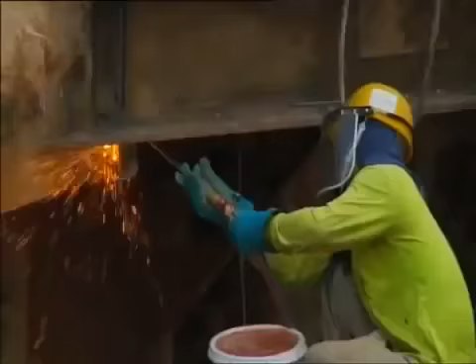Singapore's Marina Bay Sands is one of the world's most complicated construction projects. Engineers have to build not one, but 3 skyscrapers that will shoulder a sky park as big as an aircraft carrier. Worst case scenario, we get stuck.

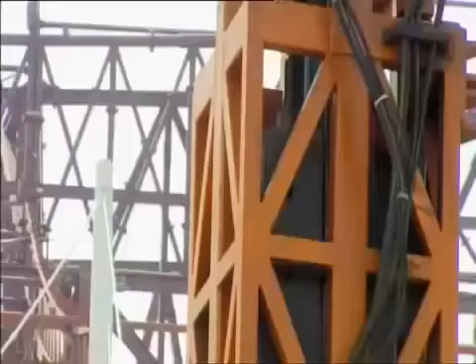They have to devise ingenious solutions to assemble a 60-meter tall museum of impractical dimensions, install giant artworks, and erect seemingly floating pavilions for shopping and entertainment. If engineers succeed, they will create a virtual city unto itself.

Singapore, the Southeast Asian country, is smaller than New York City. The lack of space forces it to build its largest leisure and entertainment hub to date on a small tract of reclaimed waterfront land. The Marina Bay Sands. It's not one megastructure, but many. Serious challenges lie in the array of buildings that form the unique complex.

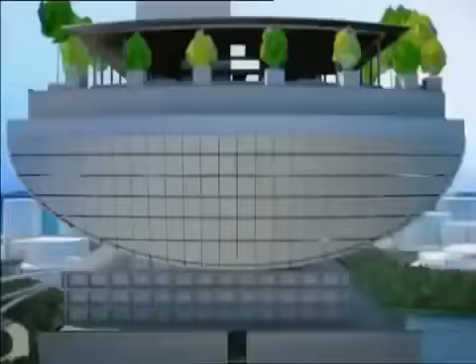3 55-story hotel towers slope at such great angles, they're in danger of buckling under their own weight. An even bigger problem is the hotel's roof. A 340-meter sky park spans its length, containing gardens, outdoor pools, and the world's largest cantilevered observation deck. But how do you build something as big as an aircraft carrier, 200 meters in the air?

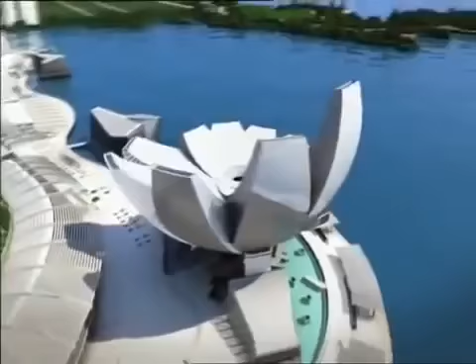In the hotel's atrium, mammoth works of art have to be somehow incorporated into the architecture. Its challenging centerpiece, a 15-ton mass of steel by a renegade artist from Britain. A 60-meter tall art science museum is designed for maximum visual impact. It will be to Singapore what the Opera House is to Sydney. Only one problem. It seems too impractical to construct.

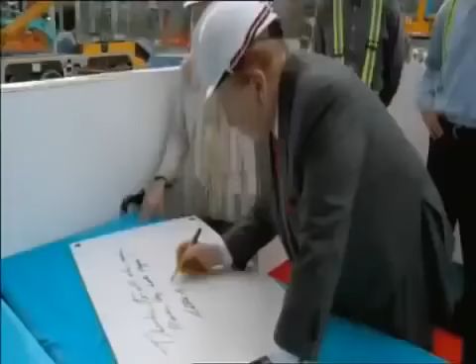And a set of dramatic glass-encased pavilions, while themselves pose little challenge, have to be built in water. The man behind the Marina Bay project understands the risks, but he believes that anything short of astounding will fail. Sheldon Adelson, one of the world's richest men and CEO of Las Vegas Sands Corporation.

What we hope to accomplish is to change the face of Singapore tourism. So we expect a very successful development. That is by far the largest and most expensive single project we've ever undertaken. It'll cost about 5 to 5.5 billion US dollars. It's a lot of money. Now, I know $1 billion doesn't buy what it used to, but by any measurement, it's a lot of money today.

Adelson believes his huge investment is safe in the hands of Moshe Safdie, a world-renowned architect. Safdie is recognized for his use of dramatic curves and geometric patterns. The Marina Bay complex will be his largest and most difficult project yet.

I think that architecture has to be timeless. Therefore, what it espouses, what it provides, needs to be something that has a long life. What's unique about Marina Bay is all the pieces coming together. You can't think about it as individual buildings. You've got to think about it as a piece of city. It's much more a symphony than it is a sonata.

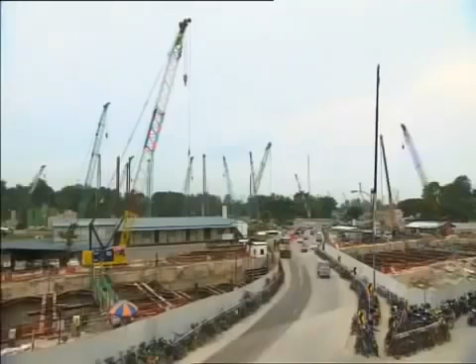On the ground, engineers are more concerned about the reality of building Safdie's vision. This is the North Retail section area. 30-year veteran John Downs is in charge of overseeing the entire project. The design is very, very diverse, and each component of the project is totally different from the others. For a project of this size, with the planning, the design, the construction, you'd be expecting somewhere between 6 to 7 years. Here is basically a 3-year turnaround.

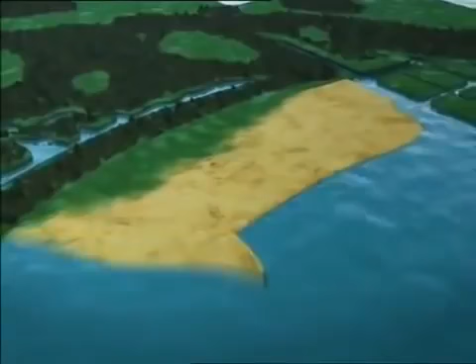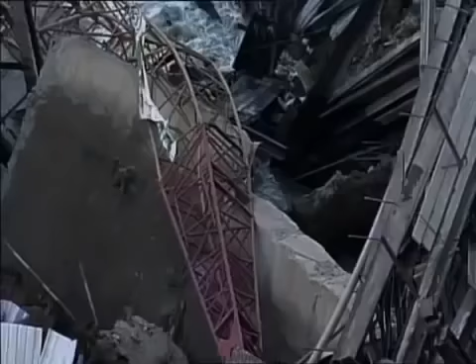Beneath the reclaimed land, which is essentially a seabed, is a dangerous layer of marine clay. Sometimes called black toothpaste, marine clay has very poor structural properties. If not given complete respect, the unstable marine clay is potentially fatal. In 2004, Singaporeans discovered the lethal consequences firsthand. A routine excavation in an underground tunnel for the mass rapid transit network causes a collapse, creating a gaping hole in the Nicoll Highway, killing 4 workers.

The ground conditions in which they were building the Nicoll Highway were not dissimilar to those we are encountering here. They had also soft clay, they had similar depths of excavation between 20 and 37 meters. One of the big things that was learnt in the Nicoll Highway collapse was the importance of monitoring movements and the control of quality as the construction proceeds.

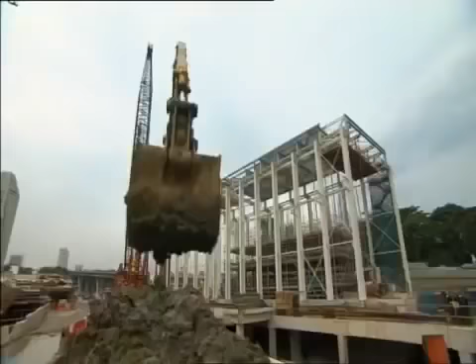Marine clay is an old foe of engineer Mike Barton. He's defeated it in the past by understanding how it behaves. The big problem with marine clay is that it is so soft that when you dig out the inside, the walls will move and potentially collapse and allow all the surrounding water in the bay into the excavation. So, before work can begin, the unstable building site needs major fortification.

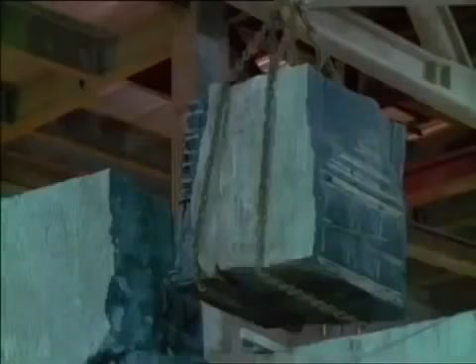To combat marine clay, engineers decide to build giant concrete walls to create stabilizing perimeters for the larger buildings, known as diaphragm walls. Up to 1.5 meters thick, diaphragm walls are steel-reinforced concrete sections, pounded 50 meters into the ground. They form watertight enclosures for men and machines to work round the clock.

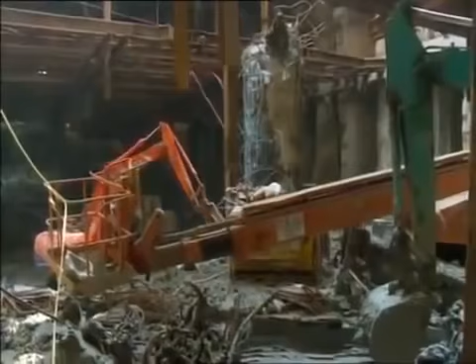In just 1 year, over 4,000 meters of diaphragm walls help produce a rock-solid foundation. The diaphragm walls that we constructed in a formation which we called a peanut formation, which is 2 circles joined together, and a donut formation, which is circular, are able to withstand very, very large forces from the marine clay without any movement. They encapsulate an area bigger than a football pitch that enables us to excavate very quickly and to build structure up very quickly.

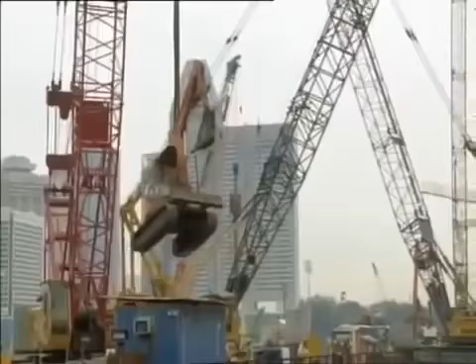Securing the footprint of the Marina Bay project has already taken a year out of John Downes' schedule. He now faces the difficult task of erecting the resort's many buildings in a space of just 2 years. Just managing the whole logistics of that, including the construction methodology, is very, very challenging for us.

To meet his tight deadline, Downes chooses the most direct solution. He hires 16,500 workers to construct every single building, simultaneously. It's like leading a small army, so organizational excellence is key.

We're just on the edge of Singapore in the CBD here. So rather than lose the contractors and the workforce to go off-site, we built our own 3-story project office. We have all of our contractors, our subcontractors here. We house our resident site staff. We have our project management team, our construction management team, our design management team, and the logistics here.

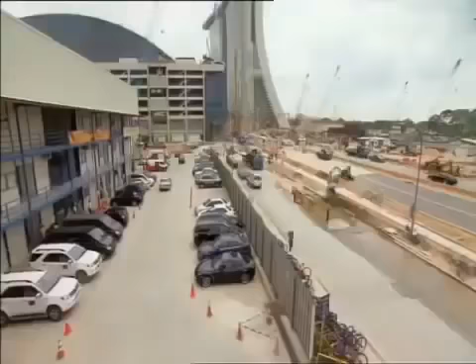Come lunchtime, the monster workforce creates another massive challenge for Downes. He responds by building one of the world's largest site canteens.

We've got 13, 14 different food styles here. You can see by my shape and size that I eat here every day. I enjoy this food. So here you can see the project bakery. It has its own ovens. It's set up for breakfast. We cater for sandwiches during the course of the day. Can I take a sausage roll, please? So, freshly cooked food, straight from the oven. We stand by our products.

The tight schedule also creates problems at the hotel towers, where engineers are already struggling with a congested site. The important thing to do is to make sure that they come in and deliver the goods straight away and then get out again. We don't want too many vehicles on site at the same time.

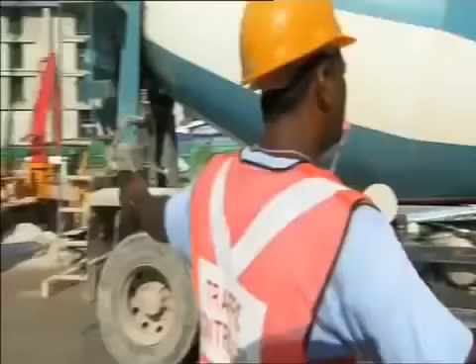To speed up construction and alleviate traffic congestion, engineers turn to a method that's proven itself countless times in the field: in situ concrete casting. Hotel walls are made on site in the thousands. And workers laying the floors are so proficient, they produce 1 floor per 4-day cycle.

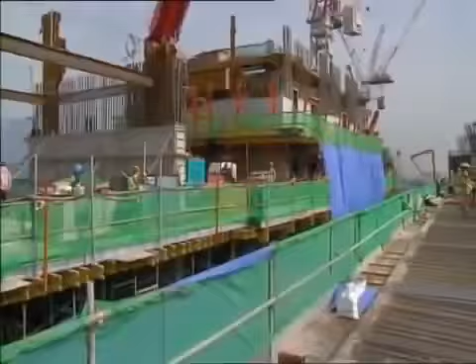It's an impressive display for a conventional solution. But the structure they're attempting is anything but conventional. The key challenge of building the hotel towers is its unusual design. Unlike other skyscrapers, part of the towers slope at incredible inclines. Like a set of collapsing dominoes, the towers could buckle under their own weight if a practical building solution is not found.

It's a major concern for engineer Craig Glover. I've been in the industry for 25 years, done a wide range of projects in many different countries, but nothing compares to this whatsoever. There was nothing we could take reference from across the street, on the next high-rise, or across town. This is a new frontier.

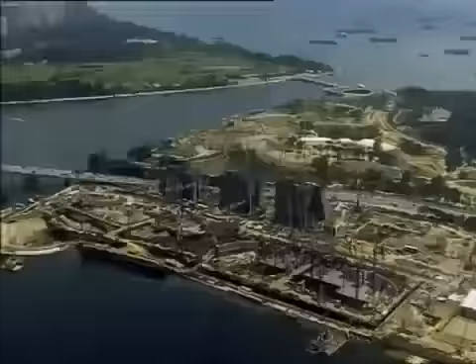Costing a staggering $5.5 billion to build, the Marina Bay Sands could be one of the world's most expensive mistakes if engineers can't solve the tower's problematic structure.

Engineer V.C. Cheong leads the design team, and their solution comes out of left field. If you look at the configuration, it's not a straight tower. It's with a sloping leg. So all this sloping leg actually is, inducing a very huge external force onto the structure. We kind of built it without any support. So we actually formulate a solution to prop up the sloping edge.

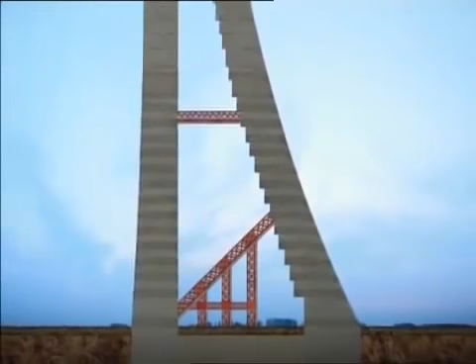Using a technique they've never employed before, engineers build large temporary struts made of strong structural steel. They prop up the sloping towers as they rise. Like a suspension bridge, high tensile steel tendons, also known as tension cables, give an added layer of support inside the walls. In theory, both the struts and the tension cables are temporary and will be removed once giant link trusses connect the towers at the 23rd floor.

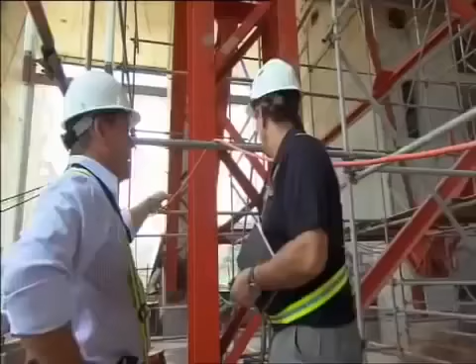The sheer weight in concrete is enough to topple the towers at level 8 if the engineer's calculations are wrong. To reduce the chances of failure, Glover and his team make a radical decision: instead of removing the temporary tension cables in the tower walls, they make them permanent supports.

I feel good it's in there because it's added strength, it's added support.

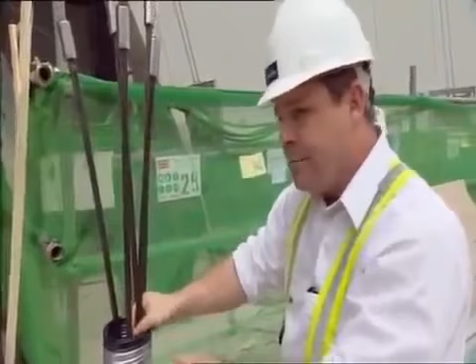We have a twined network here of high-strength steel, and what we do is we bundle these up so they form a cord with multiple strands inside this conduit. We place this conduit inside the walls prior to casting the concrete. So what we then do is once the concrete is cast, we anchor one end into the concrete.

So we then put a very high-strength pneumatic jack onto the collar and one by one pull these strands through and tension them up. What that does is basically pull the building back and hold it in place.

If these cables were to suddenly break, or if they weren't in place, we wouldn't be able to control the self-weight as we build more and more of the building up. So it's a very important part of the actual engineering of the solution, to hold the building in place until we can connect it.

Despite the team's quick thinking, the true test of their engineering decisions will only happen once the main support struts are removed and the massive link trusses installed.

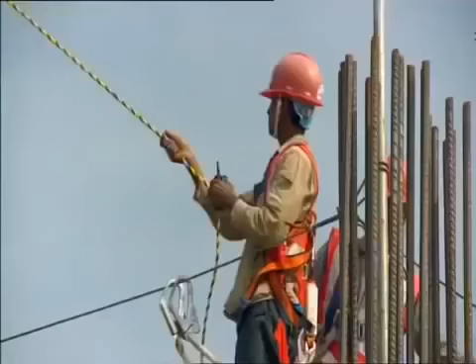Link trusses are huge reinforced steel brackets that bind the towers at the 23rd floor. Once their installation is complete, they transfer the sloping tower's weight completely away from its temporary struts.

Once we're satisfied that we don't have any stability issues, then we can bring the large hydraulic cranes in and, member by member, start to dismantle the struts.

We've got a lot of time pressure, so we've just got to make sure that these things keep moving. It's done its job holding up the building, now it's holding up the job.

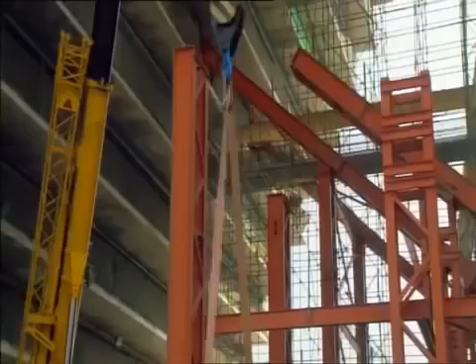As the last pieces of support struts leave the site, Glover and his team can finally breathe a sigh of relief. The link trusses are holding the building load.

So far, so good. It's a lot of theory, a lot of calculations, but until you really do it and really get it out of the building, you never quite know. I'm always waiting for the phone to call in the middle of the night that something's gone wrong.

Not all the structures have ended up according to plan. The 60-meter-high ArtScience Museum is facing a major design overhaul. Planned as a venue for blockbuster exhibitions on the arts and sciences, its bowl-shaped roof doubles as a 3,000-seat amphitheater.

Unfortunately for engineers eager to start its construction, architect Moshe Safdie isn't happy with its current shape. Somebody looked at them and said, looks like a bunch of bananas. In fact, Mr. Adelson said, looks like a bunch of bananas. I said, well, if they look like a bunch of bananas, we're not there yet.

It's terrible news for Safdie's design team, especially its principal, Gene Dyer.

There are times that Moshe will come in with an idea. We think it's quite exciting. We'll pursue the idea for weeks or even months. He'll come back and say, I want to change the idea. And we've already bought into the idea, so it's a bit frustrating.

To rework the unique geometry and dimensions of the ArtScience Museum, Dyer and his team turned to advanced 3D modeling programs. It not only makes navigating the museum's complex geometric patterns easier, it shortens the process to a matter of days. The model is dynamic and it can be moved by just changing one or two elements.

Moshe could experiment. He could make rapid judgments in a very short period of time about which way he wanted to take the project. This is a process that was impossible to do 10 years ago. Without the computer, this would take years and years and years.

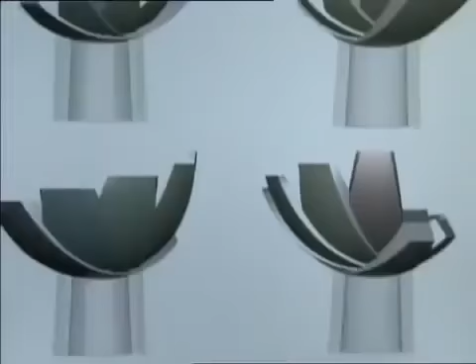To rationalize the new look into a buildable structure, architect David Robbins splits the museum into spheroid segments. We began to look at using different spheroids to define the different upper and lower surfaces of this building. That gave us a very rational way of describing the plan form to our clients.

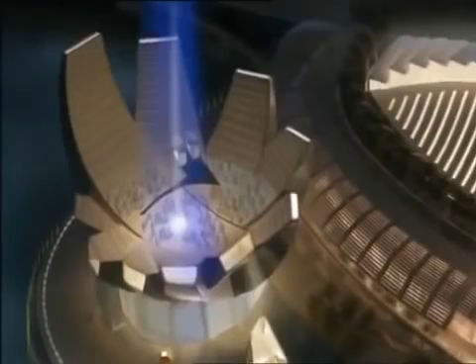After months of refining the design, Safdie is finally happy with the result. The mathematical precision that we gave them made them even more beautiful. It led some people to say, well, hand of welcome. Others said, is that a lotus? And the more ambiguous the associations, the closer I thought we were getting to our target, because I think the least exciting buildings are those which have overt symbolic associations.

Armed with the new design, engineers begin work on the museum's 60-meter-high superstructure. A staggering 5,600 steel elements, weighing some 5,200 tons, are prefabricated to exact specifications.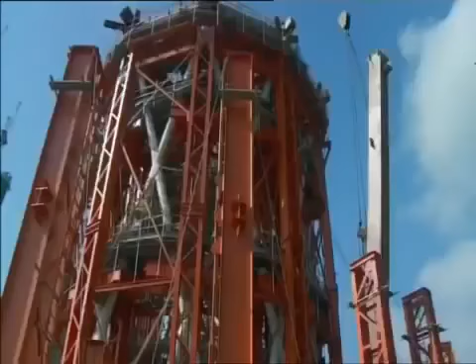They are then trucked onto site and assembled. It's like putting together a giant jigsaw puzzle. Each element has to be installed with pinpoint accuracy. If it's even a few millimeters off, engineers will have to start from scratch.

Engineers of the massive atrium at the base of the towers are facing an equally tough construction process.

Safdie has come up with a challenging design. He wants to inject art into the atrium's architecture, so that visitors will feel like they're walking through a grand Gothic cathedral. In medieval times, if you think of a Gothic cathedral, there's the architecture, there's the stained glass windows, there's the sculptures on the pinnacles. You cannot draw a line and say art and architecture. Art and architecture are one, they're singular experiences. I think what we try to do here is come back to this integrative mode.

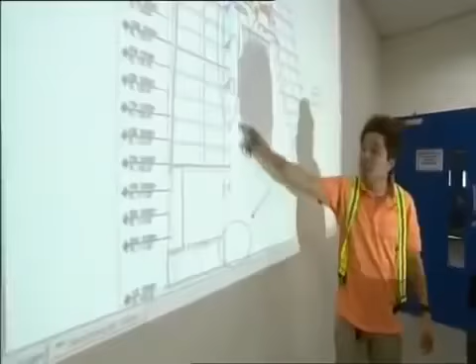To create the centerpiece of his vision for the atrium, Safdie commissions renowned British sculptor Antony Gormley. Famous for his unusual approach to art, Gormley is the brains behind the Angel of the North sculpture in northern England.

What he's about to attempt is proving to be more of a construction challenge than an artistic one. A cloud-like sculpture some 40 meters long, made up of 15 tons of high-grade stainless steel, hung 12 stories above the atrium.

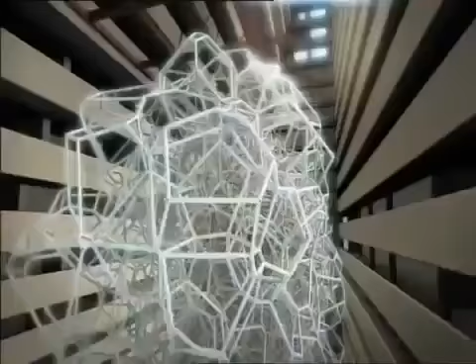The Angel of the North is, in a way, making a very traditional public sculpture because it's isolated in space at the edge of a valley. You can see it for miles and miles. It's very much about occupying space. This is about activating space. You can't see it for miles and miles. You have to be in the space with it. Each viewer, every person coming out of their hotel room will confront this big chaos thing and have to find their place in it. I think that's an exciting thing.

Called drift, Gormley's steel sculpture is so huge and so complex that it can't be sculpted using traditional methods. Gormley's team has to create state-of-the-art 3D computer programs that translate his ideas into buildable plans.

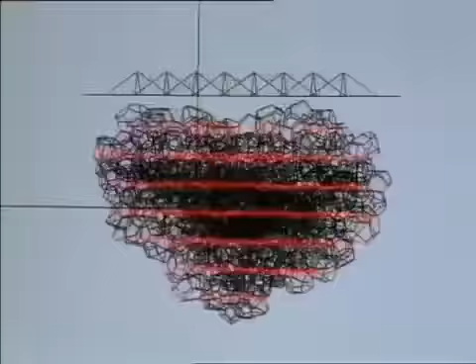But just as they're about to begin construction, a bombshell drops. September 2008, a global financial crisis wreaks havoc on markets. The flow of the hundreds of millions of dollars that keep the Marina Bay project going every month suddenly stops.

For engineer Matthew Pryor, it's a massive blow. I feel devastated. I mean, it couldn't be worse. Probably the worst day of my life professionally. There's no more money coming through. So unless we put some funding in place or there's something, we're going to have to shut the jobs down. But there's a tough decision to be made, and we don't know what we're going to do just at this point in time.

With the future of the multi-billion-dollar project plunged into doubt, all eyes turn to the man behind it, Sheldon Adelson. The next move of one of the world's richest men will determine the fate of the mega construction site.

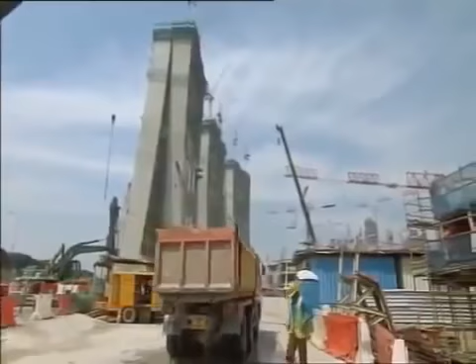The 2008 global financial meltdown is a haunting echo of the 1990s Asian crisis. Back then, progress on Shanghai's World Financial Center came to a complete halt for 5 years. For Adelson, that's simply not an option for the high-profile Marina Bay resort.

His vision of changing the face of Singapore tourism is at stake. And so are billions of dollars of investment from his Las Vegas Sands Corporation. He prefers finding a stopgap solution to weather the storm.

Throughout history, there has never been a trend that went straight up, nor a trend that went straight down. So it goes up and down. It's only a matter of time when things will recover.

In a bold move, Adelson pledges his vast personal wealth to the completion of the project, effectively ending any speculation of failure. There's a massive sense of relief in the company. Everyone's pleasantly surprised how quickly we've got through this and the fact we could hold it together and get it going again. So euphoria is probably the best way to describe it.

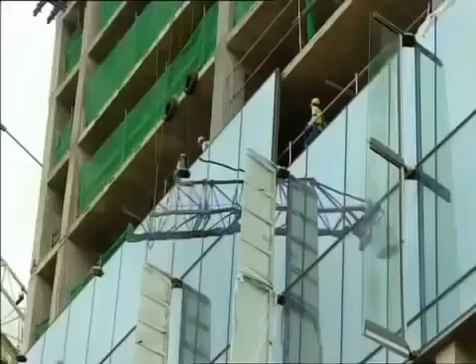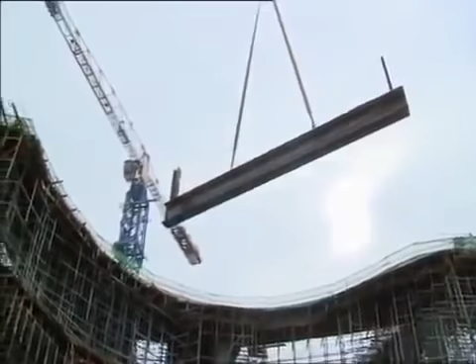With the crisis averted, construction on the 3 57-story hotel towers, the casino, theatres and convention centre resumes at pace. Everywhere you turn, steel is being installed. It's vital reinforcement for every concrete structure on the 15.5-hectare site.

For one project at the tower's atrium, steel is more than just reinforcement. To construct the 15-ton drift sculpture by British artist Antony Gormley, engineers had to first laboriously prefabricate it into over 70 segments.

The segments are then welded into 8 slices and will ultimately form the sculpture. It's a tricky operation, but engineers are able to complete it swiftly due to a system of codes and numbers that enable them to quickly identify what goes where.

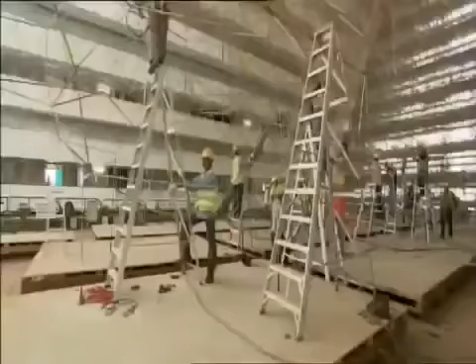Once all 8 slices of drift are fully assembled, it's lifted up into position by a temporary lifting frame. A massive box truss on the atrium ceiling then takes over the load. In theory, the box truss will support the weight of the lifting frame as it's being lowered down.

It will be a heart-stopping moment, especially for engineer Graham Stevenson. The lifting frame is about 9.5 tons, so when it picks up and gets some momentum, there's a potential that it just wants to flick over and rotate through its full 90 degrees, and we won't have it under control.

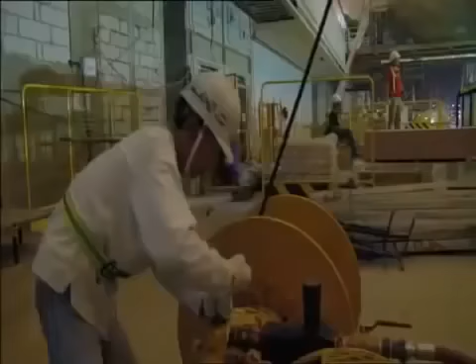Stevenson's solution: 4 powerful automated hoisting drums located at the 4 corners of the frame. They allow workers to control the strength and speed of the operation with high tensile steel cables. A spotter at the top determines the pace of the procedure and marshals the team.

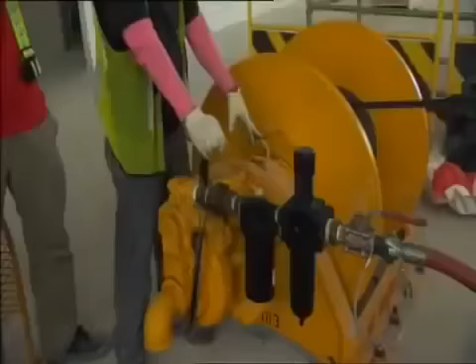With their preparations complete, it's time to face the moment of truth. Sculptor Antony Gormley is as anxious as any of the team. The entire operation is estimated to take up to 10 hours to complete. As soon as the frame is in motion, there's no turning back.

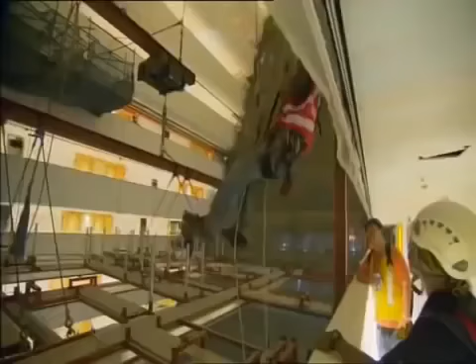Midway through the lift, Stevenson receives reports of a potential problem. 22-story, number 7 temporary cable, scaffolding touching the cable. Why you got the temporary cable touching the transverse? Yeah, nut. But is it just the end of a tube? Yeah. So you can just cut the tube? Yeah. Problem solved.

But what was previously an estimated 10-hour procedure now turns out to be a 24-hour marathon lift. At 6 a.m. the following morning, they complete the job. Absolutely fantastic. The Gormley is now finally in its final position, so really an end of a long and exhausting day, and big thanks to everybody, but it's finally done.

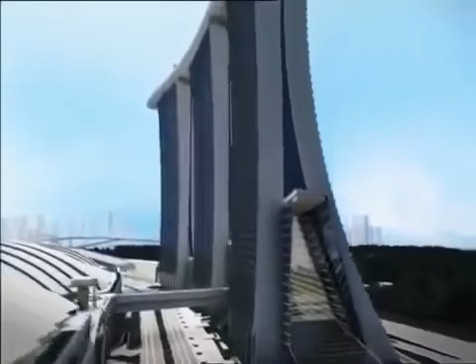While the drift settles into its new home at the hotel atrium, elsewhere attention is focused on one of the project's key features, the Crystal Pavilions. The two glass-encased buildings by the promenade are set to be the resort's premier shopping and entertainment complexes. But before engineers can make them a reality, they have to secure their footprint. And already a major obstacle threatens to sink their objective.

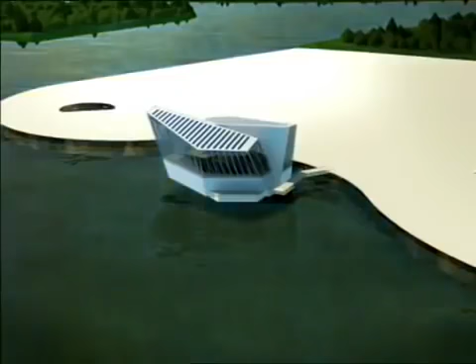The Crystal Pavilions are situated within the confines of Marina Bay. So to found it, engineers have to find a way to build in 6 meters of water. The responsibility of tackling the problem falls on the shoulders of engineer Kurt Vella. I'm from Sydney. The underlying foundation in Sydney is sandstone, it's rock. All you need to do is just dust off the surface and you can build skyscrapers on it. Here it's very different. All the structures have to be heavily founded.

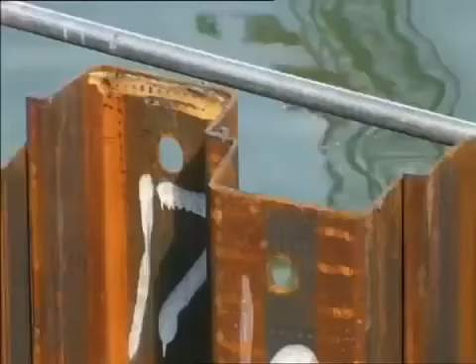To keep water out of the construction site, only one solution seems viable for Vella and his team. A waterproof steel structure called a cofferdam. This temporary formation surrounds the worksite with a circle of steel sheet piles, creating an impenetrable shield that locks out the water, keeping the workers safe within. For the job, they rope in a 12-ton vibro hammer. It punches the sheet piles deep into the earth, making the cofferdam rock solid and resistant to movement.

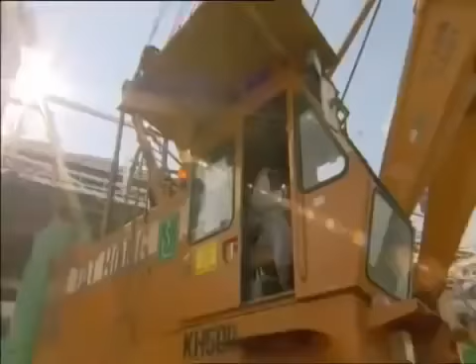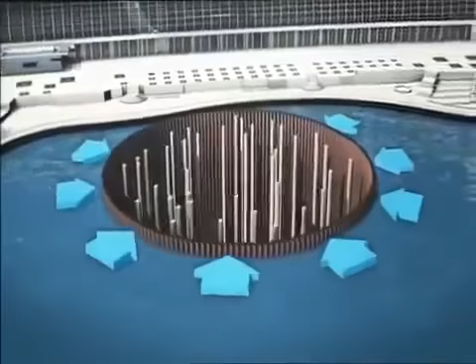With the cofferdam secured, engineers deploy powerful diesel pumps and run them 24 hours a day, ejecting any water that remains within the walls. This last step comes with inherent dangers. The force of the water outside creates what engineers call hydrostatic pressure. In theory, it's powerful enough to force water through any gaps in the cofferdam. It's something that Vella prays will not happen.

There's a bit of hesitancy and concern because we've got to build this building in the middle of Marina Bay. Everybody can see what we're doing, so if it leaks, it's a problem. If it fails, if it moves, if it collapses, it'll be an absolute catastrophe. After a day of pumping, Vella's worst fear comes true. Parts of the cofferdam are leaking.

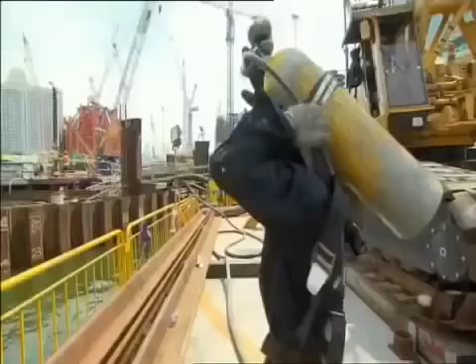To rectify the problem, Vella orders a team of 8 divers into the water on 10-hour shifts. Their mission? Find out where the water is being forced in and plug them shut with epoxy resin. Anson Lee is an 8-year diving veteran. The toughest part of our job is the environment.

The visibility is poor here. It's totally zero, I cannot see anything here below. I solved that by feeling the suction and then feeling out the thing. You have to overcome all the fear that you can't see under the water, but okay lah. I feel proud to be one of this team to build this thing out.

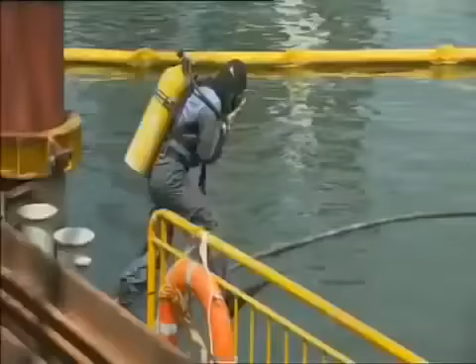After 2 weeks of hard work by divers and the pump crew, the job is finally complete. Kurt Vella can also breathe easy. Every job is different, every job has its challenges. You plan and prepare, you try and identify your risks in advance, and you try and come up with contingency plans. And that's what's really enjoyable from my perspective. That's what gets me out of bed in the morning.

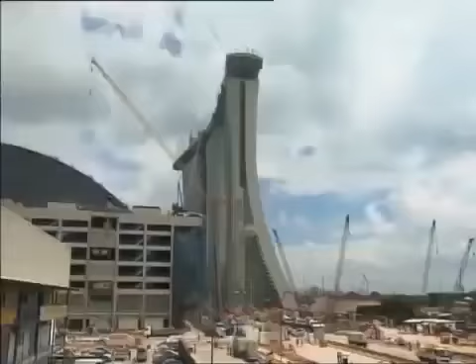After 2 years of battling the elements and overcoming difficult construction milestones, the 3 sloping towers of Marina Bay Sands can finally celebrate their topping off ceremony and move on to the next phase. But a destructive force of nature threatens to throw a spanner in the works.

With climate change predicted to affect the pattern of Southeast Asia's typhoons, Singapore may one day experience the destructive tropical storms plaguing its northern neighbors in the Philippines and Taiwan. When that happens, typhoon-force winds could spell disaster for the hotel towers, especially the 340-meter sky park sitting on top of it. The force of the wind can make both buildings sway dangerously, causing irreparable damage to the structures.

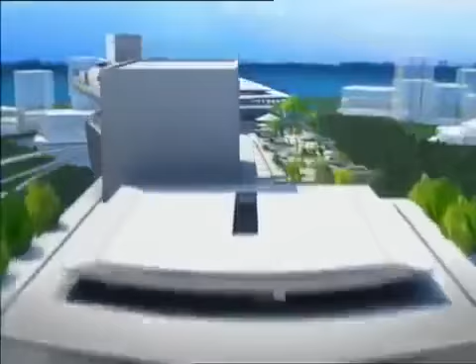The Sky Park, offering 360-degree views of Singapore. The visionary design will have enough surface area to park 4.5 Airbus A380s. But when architect Moshe Safdie first mooted it, it stemmed from a purely functional need. Luxury hotels, as we think of them, always have lots of open space around them, gardens, at least in the kind of tradition. But we didn't have much space left.

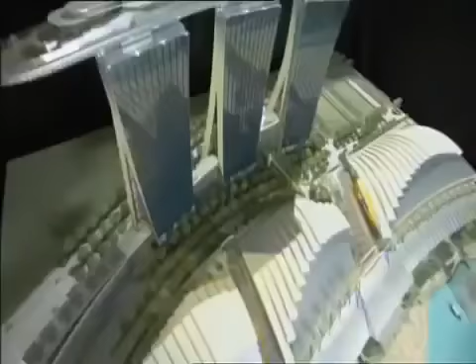And at that point, I figured, well, if we cut out of an extrusion of foam the kind of slab that goes over those 3 towers, and we placed it there, and we said, what do we have here? My God, that's some park. And so that's where the idea was born. That's what makes us a resort. Safdie's revolutionary idea scores points for ingenuity, but it clearly isn't what nature intended.

Typhoon-force winds threaten to rock the towers and its sky park, causing unimaginable damage. If engineers are to make the building a reality, they'll need a rock-solid solution. Engineer Tony McKee has little time to make things happen. At the moment, we're running a couple of weeks behind what we'd originally planned. We're not entirely happy about it, but at the end of the day, we've got to do this safe and we've got to do it properly.

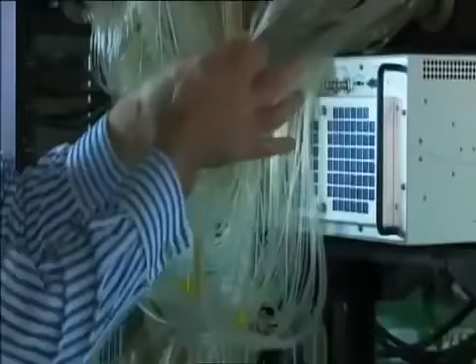To fight the enemy, McKee knows he has to first understand the enemy. He hires leading US wind engineers CPP to carry out extensive testing on the towers and Sky Park. Their mission? Find out how Singapore's potential wind forces affect the buildings. Wind engineer Roy Denoon oversees the process at their state-of-the-art wind tunnel in Fort Collins, Colorado.

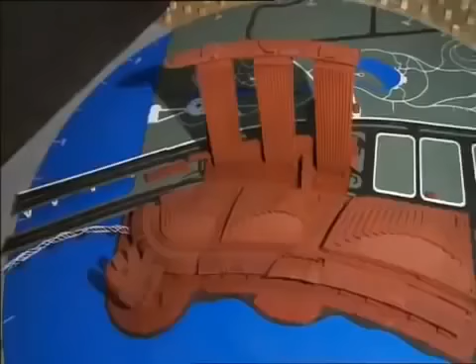The thing that makes this really special is the fact that we have this sky park running across the top, linking all the towers together. So whereas normally with a normal tower, we'd measure the loads on the tower in isolation, with this one, what we're needing to do is to measure the loads on all 3 of the towers at exactly the same time. So that way we can know how the towers are going to move relative to each other, so we can make sure that they're not going to put excessive strains or movements into the sky park.

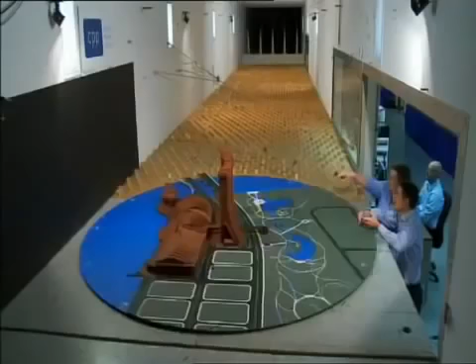During the tests, a scale model of the Marina Bay Towers is blasted with 40km/h winds to simulate faster typhoon winds in reality. Over 1,000 pressure measuring instruments inside the model register how the winds affect the buildings. At the end of the tests, engineers confirm that the 3 towers can deform by some 200 millimeters during the fiercest storm. Engineers quickly figure out a solution: movement joints.

Inspired by bridge engineering philosophy, movement joints are essentially gaps located between the concrete towers. The huge gaps allow for movements of up to 250 millimeters. Aluminium and stainless steel plates act as sliding components. They can move back and forward over each other, a little bit like you'd see in a flexible bus, where you have that articulation happening in the middle. It's a similar concept to that. To accommodate the differing movements of the three towers, engineers install multi-directional steel bearings below the sky park.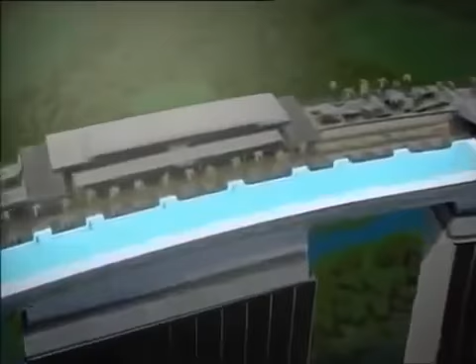The solution scores major points with Tony McKee. Only one problem. It won't work with a rigid structure containing 1.5 million litres of water. Any movement in the joints could fracture the sky park swimming pool, endangering lives and property below. With the help of US pool builders Natare, McKee quickly develops a solution, but it's completely unproven. A secondary system of movement joints built into the pool itself. The plan: to split the pool into 3 smaller 50-meter units. Steel top hats then conceal the gaps. Huge basins catch any runoff pushed up by the moving pools.

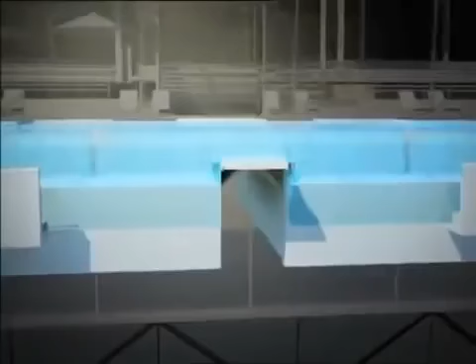McKee knows he only has one chance at making this work. So he commissions a trial by water. What we've got here is the side of the swimming pool, which replicates the movement that we're going to get between the towers. And what the Natare guys have come up with here is a simple track system which can be pushed back and forward by a forklift. And that replicates the full range of motion that we have on the swimming pools, which can be 0 to 250 millimeters either way.

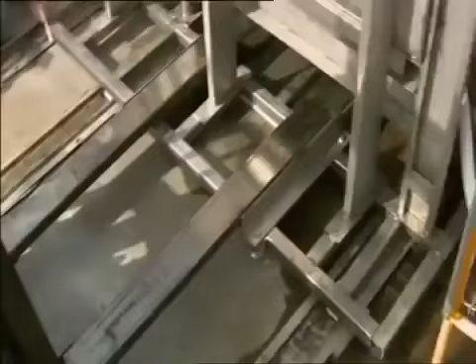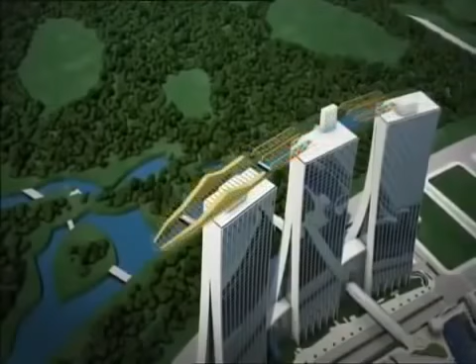It takes engineers weeks of testing before they're completely satisfied. Armed with the final results, McKee can now safely begin construction of the sky park. Consisting of some 10,000 tons of steel, the sky park is as big as an aircraft carrier. The most practical way for engineers to construct it is to break it into 14 segments on the ground before assembling it at the top of the towers.

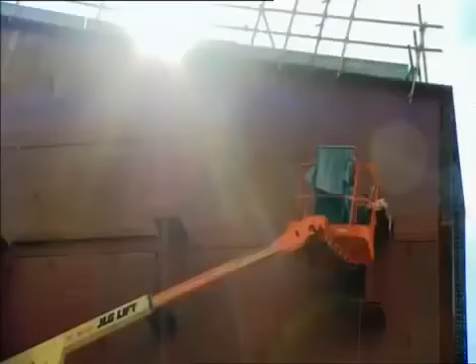There's no room for miscalculation at 200 meters in the air. Each segment is carefully prefabricated and tested by steel specialists Yongnam, and then trucked to the site independently. From the very beginning, McKee and his team anticipate that their biggest challenge will be lifting the 2 largest segments of the sky park, the box girders. Measuring 80 meters long, their combined weight is a staggering 1,400 tons.

How do we feel? A little bit of apprehension. You know, it's a significant lift that hasn't been done before. If something goes wrong, it could be really significant for us. To reduce risks, McKee turns once again to proven bridge building technology. In a process known as strand jacking, giant temporary lifting gantries made of strong structural steel will use powerful hydraulic jacks to lift the box girders up to the top of the towers before sliding them into place.

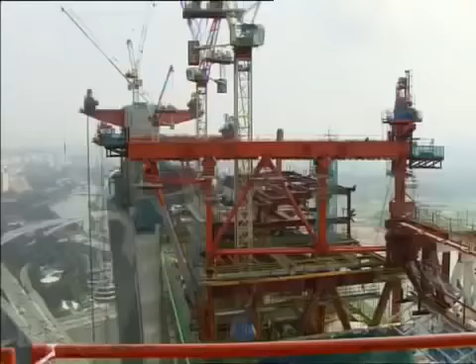It will be the longest and largest lift of its kind in the world, and McKee needs the best in the business. He puts a pioneer in the field in charge: Swiss-French company VSL. Engineer Eddie King and his team have successfully raised bridges, stadium roofs, and even Ferris wheels. The toughest part of my work is you have to plan everything very precisely, because everything is set up in millimeters. So we have to lift up and slide it in and position it in 5 or 10 millimeter accuracies. If we don't do it properly or safely, the biggest hazard is the thing can fall down to the ground.

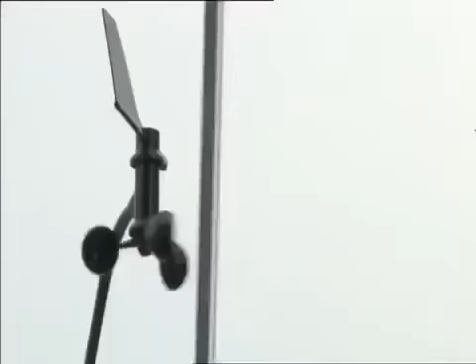Other factors further complicate the lifting process. Due to an increasingly tight schedule, the team is forced to conduct the lift during Singapore's annual monsoon season. It's almost impossible to predict when a tropical storm will hit. When it does, the accompanying lightning strikes can endanger lives. And because the whole operation takes place meters from a jam-packed highway, curious onlookers will be able to see any mistakes the engineers make. It's a potential public relations nightmare.

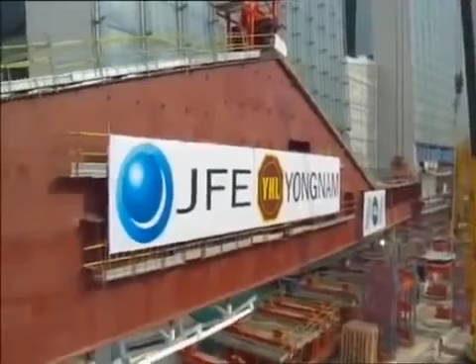Worst case scenario, we get stuck. And then we've got to figure out how to release it, how to continue lifting, because basically once we get going, we keep going. Okay, now I stop, huh? During an estimated 16-hour lift, the box girders will move at a cautious 14 meters per hour. Eddie King and his team constantly check their weather gauges for any incoming storms. The hydraulic jacks are also inspected regularly for overheating. No one wants the operation to stall in mid-air.

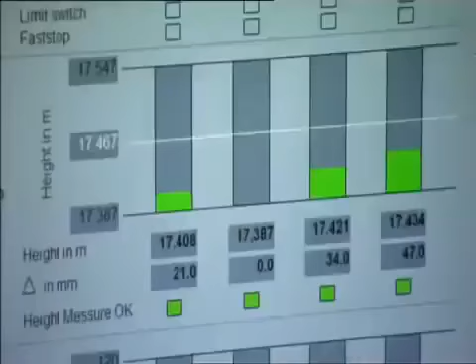Despite the team's best efforts, Mother Nature catches them by surprise. Okay guys, rain is coming. It's better we stop here. An approaching downpour threatens to grow into a lightning storm. We are at 200 meters above and the surrounding buildings are quite far away. So there's a chance of the lightning striking on the high point like this. So we've got to stop and wait until the weather gets better before we continue our lift.

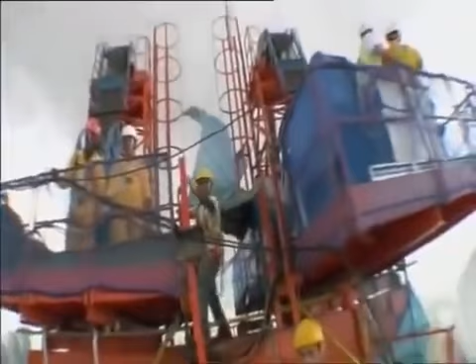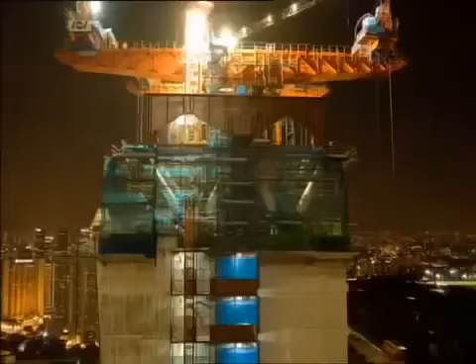McKee's worst fear comes true. If the girders remain stuck at midway for too long, he will have to order them down. Okay. After a tense 3 hours, the lightning threat passes, and the operation cranks back to life. By the time the box girders slide into position, it's past midnight. Everything went quite smooth today, so we hope tomorrow we can do the same, smoothly bring it in and we'll transfer to the permanent position.

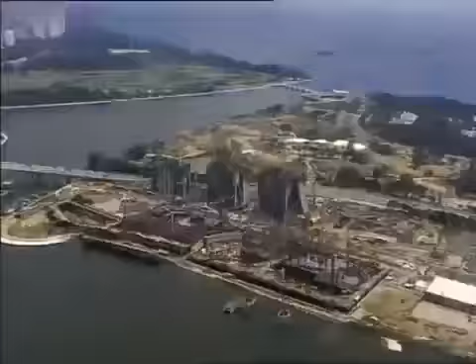With the lessons learned from the box girder lift, the rest of the segments go up smoothly. As the final piece rises into place, Singapore is already marveling at the team effort behind one of the world's most ambitious building projects. In just 3 years, engineers overcame seemingly impossible construction challenges, defeated marine clay, engineered ingenious design solutions, and survived the most debilitating financial crisis since the 1930s. As the finishing touches are put on the resort, the stage is set for an opening party, Singapore style.

Those involved reflect on the project that has already far surpassed their expectation. It's a bit kind of overwhelming, you know. I'm in the process of disconnecting the umbilical cord. It's not easy for an architect. This type of project probably only comes around every 25 years or so. So it's been a lot of hard work, extremely challenging.

I really can't imagine, I couldn't list the number of challenges we've overcome along the way to get to today. Everybody is saying this is kind of a miracle, you know, never seen anything like it. And it's rewarding, it's nice. The Marina Bay Sands, Singapore. Proof that with visionary design and engineering know-how, Megastructures can still defy the odds and fulfill the wildest dreams.